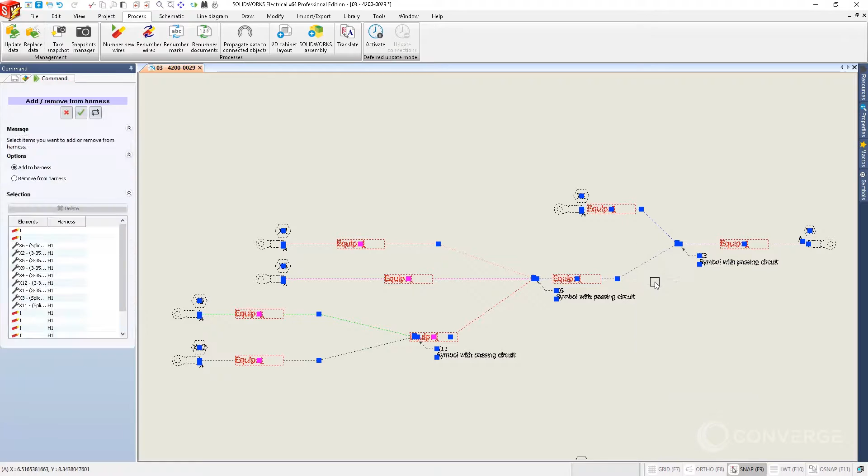You can now accurately represent real-world designs connecting multiple wire styles together. You can add all the wires and components to a single harness to prepare for 3D routing. When moving to 3D in SOLIDWORKS, this design is also supported. Simply add in a 3D part for the symbol and route as previously performed.

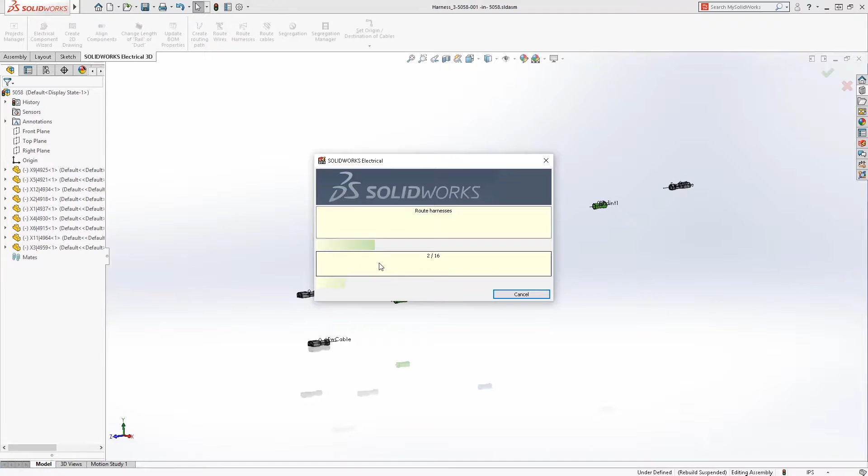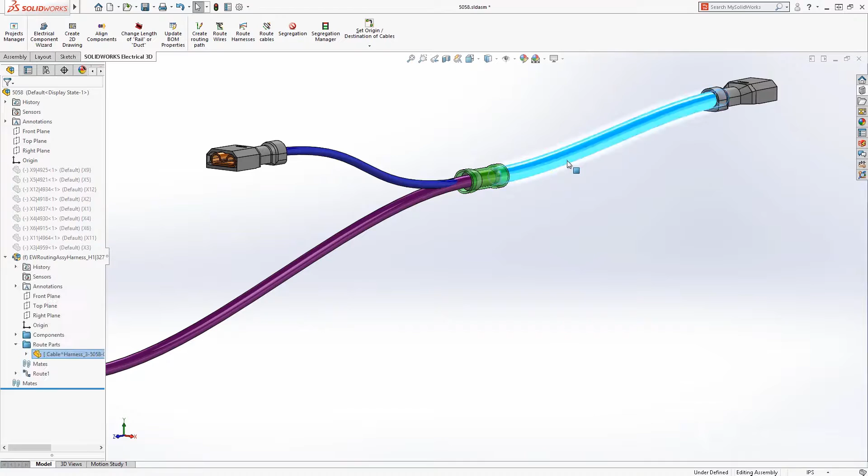Now in SOLIDWORKS 2019, you can create partial and fixed length coverings on your routes to easily represent tape, labels, and more. The new Partial Coverings Manager provides you with two options for defining your coverings. If you know the required length of the coverings, simply specify the value and define the offsets. If the length is unknown, you can specify offsets to achieve the required design. This is ideal for fixed length items such as labels or items that need to cover the majority of the route.

You are able to leverage your existing coverings library as well as create your own. You can even apply more than one covering per route. All of these new features will help you create realistic routes within SOLIDWORKS Electrical 3D.

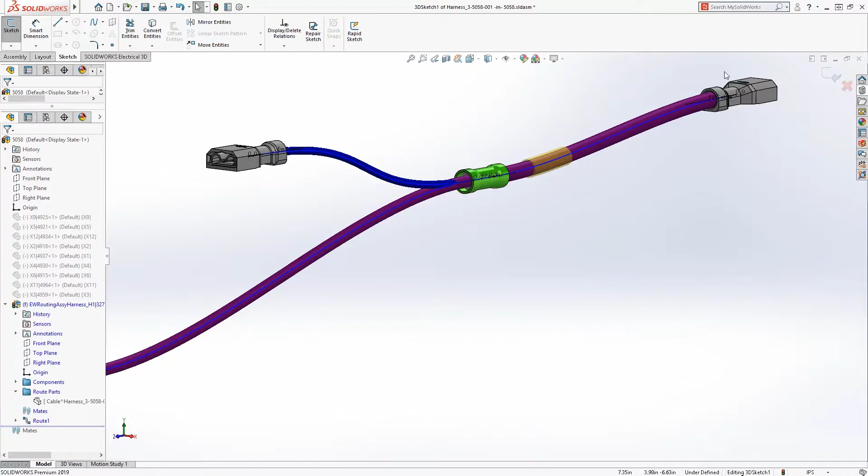SOLIDWORKS 2019 has a number of performance improvements as well. In the Routing Library Manager, the workflow in the Component Wizard has been revamped, reducing the number of steps and time required to run the wizard. The Select Components, Import Data, and Export Data functionality on the Piping and Tubing page has been streamlined as well, with improved performance and options to exclude folders within a scan. Reduce the time spent managing your library and get back to designing.

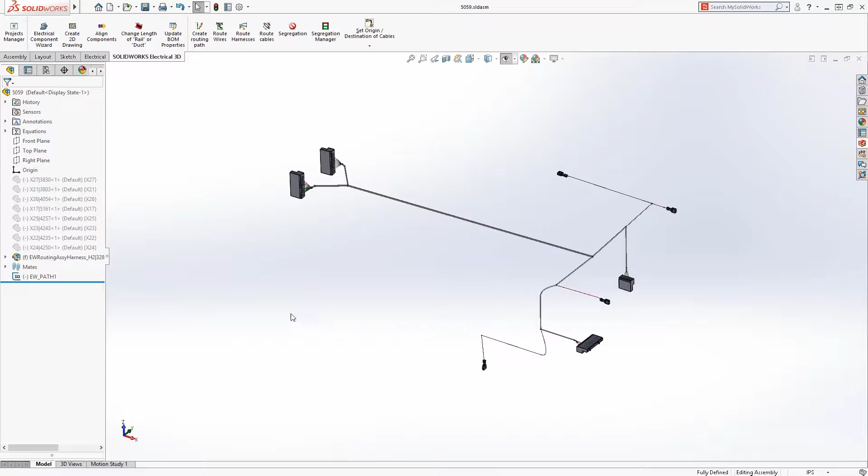SOLIDWORKS Electrical 2019 has improved the flattened drawing creation process with enhancements to save you both time and effort. Let's start with another harness in our project that is already complete. Improvements to the flattened drawing parameters make it easier than ever to create final drawings with SOLIDWORKS Electrical. New parameters and drawing options allow you to specify both the template and sheet formats. Create drawings in a format ready for inclusion in electrical file sets with the right size and templates to match the project.

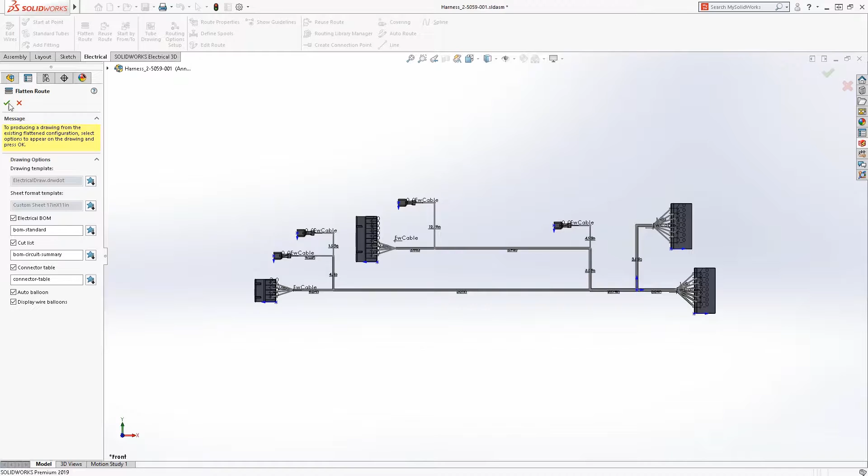Defining the options during flattening will reduce the need for editing after sending the flattened drawing back to electrical. Updates to the annotation flatten options make defining the start point and modifying the results a snap to ensure you get desired results. The flow of data between SOLIDWORKS Electrical and SOLIDWORKS Routing has been streamlined, resulting in accurate, clean tables on your flattened drawings. Components and wires are included in a single BOM with individual item numbers, making ballooning a snap.

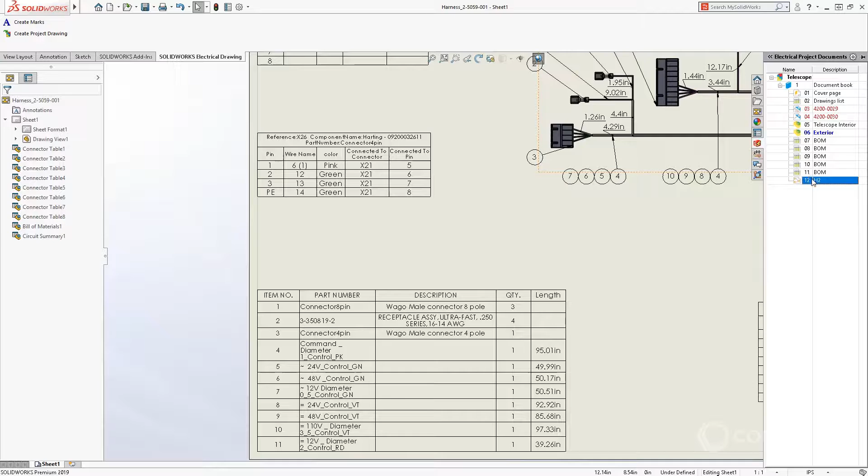As always, send the completed drawing back to the SOLIDWORKS Electrical project with both the blank sheet and template. Be sure it fits properly with our default electrical title block. Complete your flattened drawing layouts with easy, precise results in SOLIDWORKS 2019.

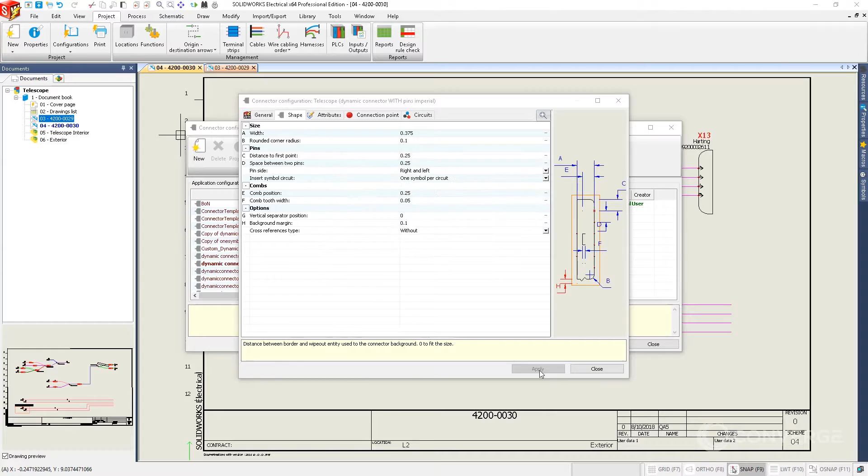In SOLIDWORKS Electrical 2019, the dynamic connector has new configuration and insertion options, creating even more flexibility when defining connectors on the fly. The connector configuration has expanded the parameters available to define the connector shape, with choices including corner radius value and pin side. It is easy to leverage the dynamic connector tool regardless of the symbol needed.

Let's add a new connector to this project to finish our harness design. New options in the insertion panel make it easy to turn on or off common variations to the same base symbol configurations. Wipeout frames, rounded corners, and continuation zigzag can all be individually controlled for simple modifications.

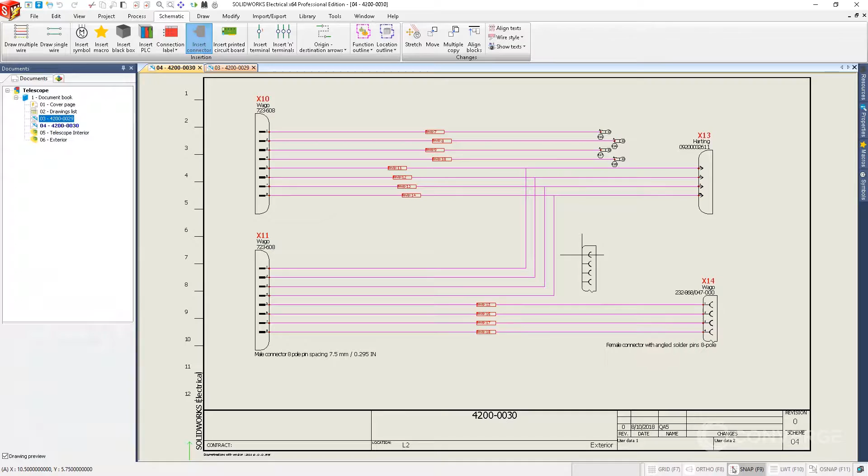Let's finish adding this connector on our other schematic. Note the zigzag indicates that this is just a part of the connector. These new options make it easier than ever to quickly define the exact connector symbol you need.

Creating and customizing reports is also now easier. The report editor has new modification options that enable you to control the results of your report generation. Isolate tables to a single page and add the table name to the schematic name. With more granularity, generated reports are more flexible, simplifying the design process.

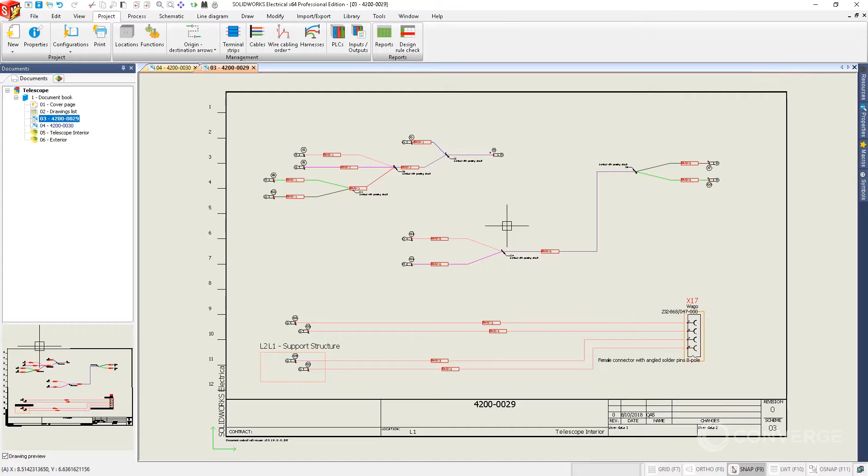Occasionally, creating just the right report requires the use of the expert mode to modify the SQL query. Enhancements to the SQL query editing tools make it easier than ever. The list of available variables on the right-hand side has been expanded to include application databases, keywords, and views. Simple and extended views are groups of commonly combined variables in one table.

Just insert the desired field to start building. A quick test confirms the addition was successful. All that is left is adding it to the column for the final report. Consolidated tables make report customization a breeze so you can focus on designing.

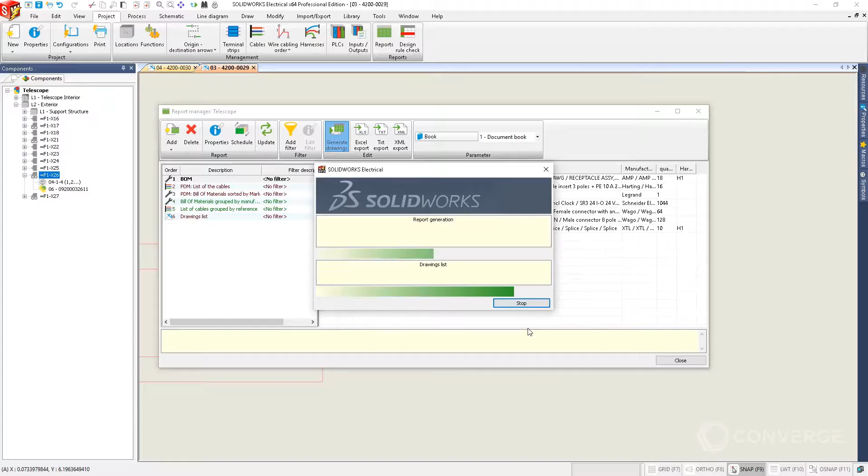Now, when working with the report in the manager, you may have noticed hyperlinks to review the part properties or to navigate to the schematic symbol. New in SOLIDWORKS 2019, generated reports contain hyperlinks to related component properties and symbols just like in the report manager. Let's generate this report and take a look.

Now with easier navigation and more ways to customize your reports, SOLIDWORKS Electrical 2019 makes it easier than ever to get your projects done faster with the right information.

SOLIDWORKS Electrical 2019 includes a number of user interface enhancements, increasing ease of operation and productivity. The first thing you will notice is that the icons have been updated to support 4K monitors. A number of windows have seen a facelift, including the Revision Manager and the Libraries Manager. The Go-To command has been integrated into the PLC Manager and in the Wire Cabling Order Manager, again reducing the time spent navigating the project.

Another great time saver is the new option to convert single line or schematics to mixed scheme drawings, if you need to expand to include both styles. Throughout the software, a number of new time-saving buttons are now available. Insert macros from a new button in the schematic ribbon bar. Within the Origin and Destination Arrow Manager, a new option allows you to delete multiple arrows in a single operation,

reducing the clicks required. Finally, the new Cable Core Swap button in the Terminal Strip Manager lets you quickly fix a common mistake right from the manager with no need to go back to the schematic. All of these UI improvements make it easier than ever to navigate the software and complete your designs.

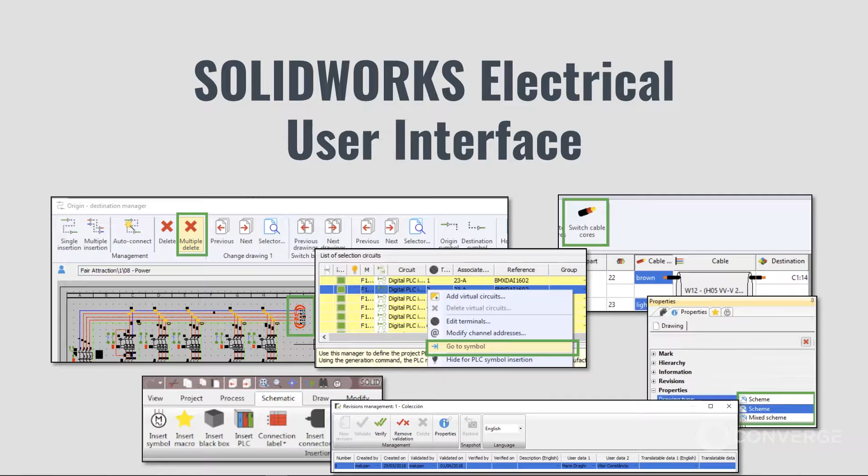As you work within SOLIDWORKS Electrical 2019, you will find a variety of delighters to improve your work processes. New in 2019, archive projects using the Archive Project Wizard to choose whether dependencies like 3D files, images, and shortcut data are included in the archive. Ensure the project archive includes exactly the data you need the first time.

A new report captures termination type information applied to manufacturer's parts and aggregates the data into one report, grouped by type. Easily reference all the termination types needed for a project in one place. Control the termination types available within the new Termination Type Manager.

In the Manufacturer's Parts Manager, you will see a new option to set the display units of each part's properties in the manager, as well as that superparts have been renamed to electrical assemblies, resulting in a cleaner, easier to use interface. Keep a lookout for new functions in the Project Configurations Manager, including black box connection point customization labels and renumbering component priority order. Black box connection point customizations in particular are an exciting option to ensure even on-the-fly components represent required information from the start.

SOLIDWORKS Electrical introduces the PDM connector tool as a new data management option with SOLIDWORKS PDM Professional. It is a powerful and unique integration in the electrical software sphere. Manage your electrical files with the familiar and powerful SOLIDWORKS PDM interface. The project folder structure in SOLIDWORKS Electrical is mirrored in the project structure within the vault.

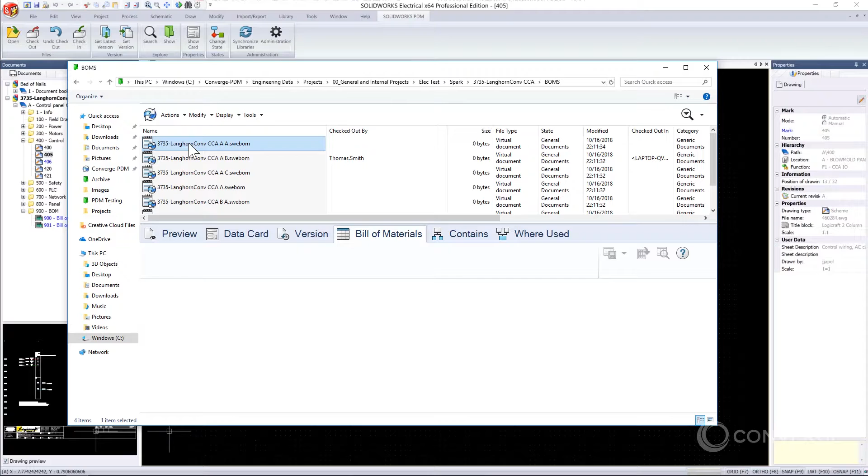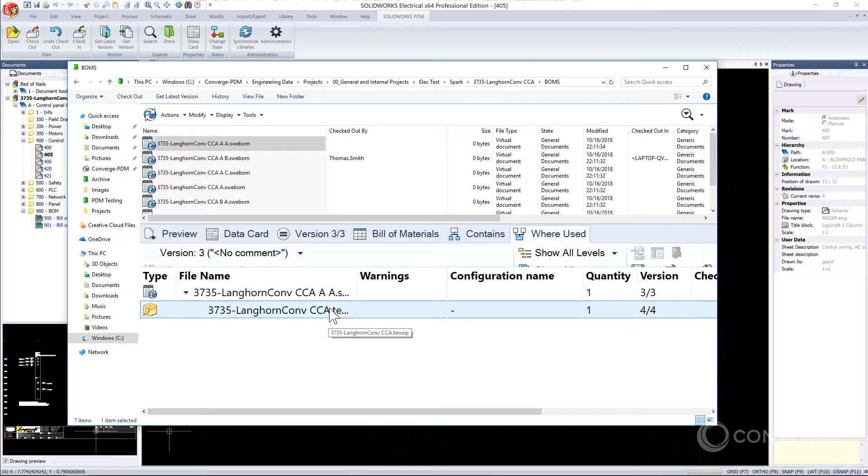Accurate bills of materials are automatically placed in a separate folder, and they are easily accessible by anyone across the organization, not just the electrical designers. Information for these parts is synchronized between the SOLIDWORKS Electrical Library and the SOLIDWORKS PDM Vault. Use SOLIDWORKS PDM as your true source for all product design data, not just mechanical. Design teams will always have access to up-to-date information, keeping your project accurate and on time.

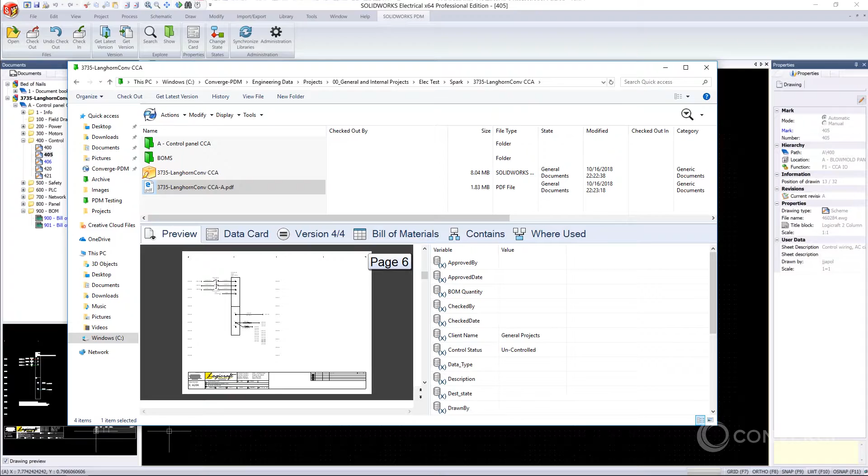The brand new SOLIDWORKS PDM connector tool for SOLIDWORKS Electrical gives you greater control while enabling better collaboration between mechanical and electrical design teams. SOLIDWORKS Electrical continues to advance and innovate, reducing project timescales and increasing product quality.

For SOLIDWORKS 2019, they have added new capabilities to PCB collaboration to be able to import copper as well as decals into SOLIDWORKS. This control can be found inside of settings for the collaboration. The first thing we are going to do is turn the copper option off. I have pushed this design from SOLIDWORKS PCB with the copper option off and opened it inside of SOLIDWORKS Mechanical.

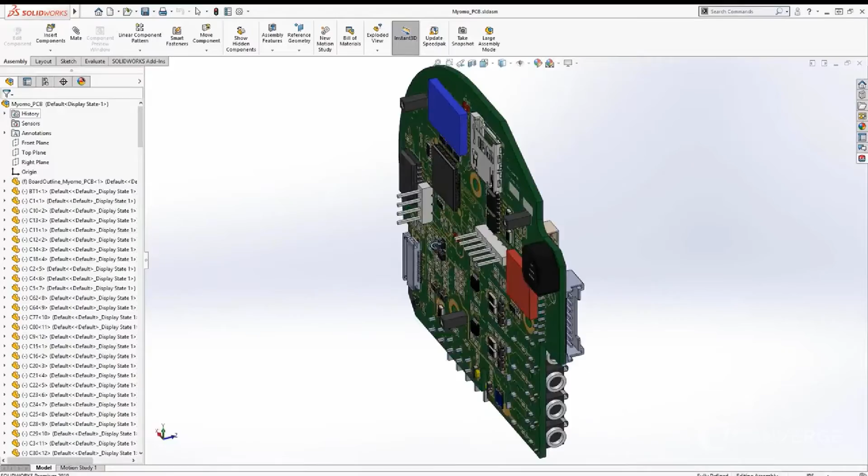I've brought in the design, and you can see the decals and graphical representation of the top and bottom layers. There are no inner layers for copper inside of this design. By turning the copper representation on, we are going to re-import this design from SOLIDWORKS PCB. This new design will bring in additional information for decals and copper representation on all layers.

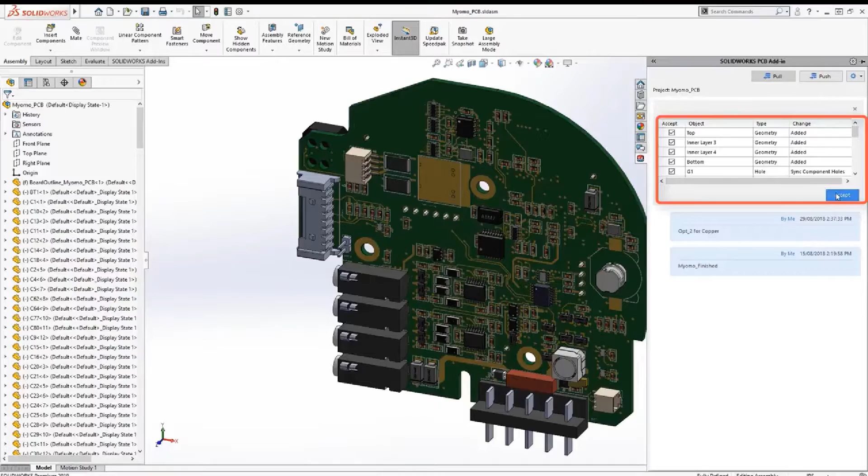SOLIDWORKS Mechanical automatically notifies us of this new version from PCB. Noting we have additional copper layer information, we are going to accept these and open inside of SOLIDWORKS. My feature manager will now have additional layer information for the copper layer as well as decals from PCB. Back in SOLIDWORKS, we are going to change the transparency of the board so we can see inside the inner layers, and all the copper layers are now visible inside of MCAD.

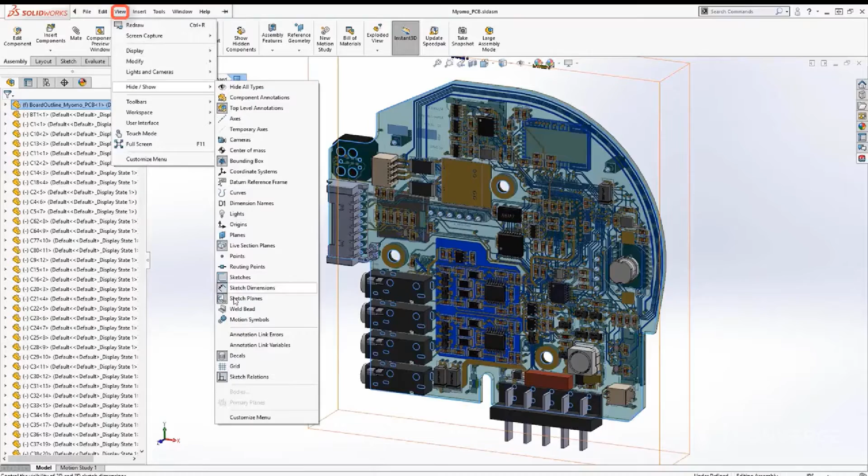We are going to hide all decals so it's easier to identify the inner layers. We are also going to assign different colors to our copper layers. We can now see that every trace and every via can be viewed inside of SOLIDWORKS Mechanical just as it is inside of PCB. This allows the mechanical engineer to see how much copper is on each layer, also allowing him later on to transfer this copper information into flow simulation for thermal analysis, allowing PCB to collaborate with MCAD for in-depth studies.

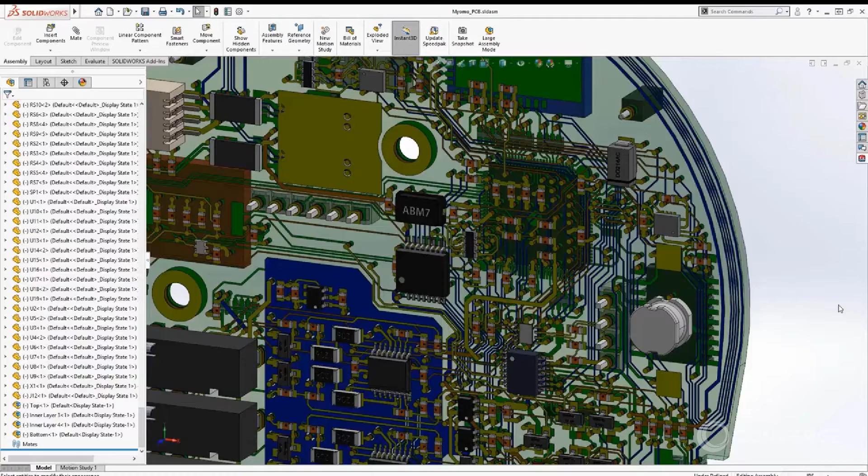When designing a PCB board, you might not always know the location of mounting holes for other mechanical features. Using SOLIDWORKS PCB, we're going to send this blank board to our mechanical engineer and have him add mounting holes inside of SOLIDWORKS. Using the same SOLIDWORKS PCB collaboration, we are going to look for a blank board that we have sent by searching in projects and opening inside of SOLIDWORKS.

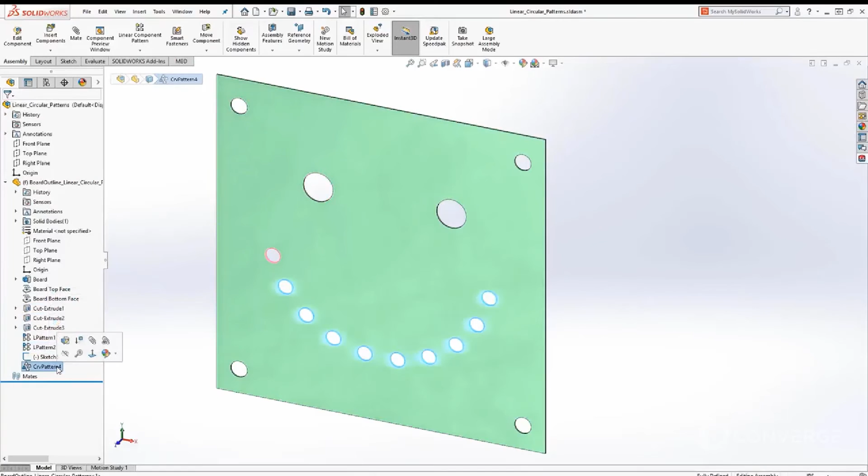The mechanical engineer has added different size holes on this board, utilizing many of the SOLIDWORKS patterning features to create them. Once he has completed his design, he will push it back to SOLIDWORKS PCB. SOLIDWORKS PCB automatically notifies you when a mechanical engineer has made changes. We will accept all the mounting holes and other holes which will automatically show up in PCB.

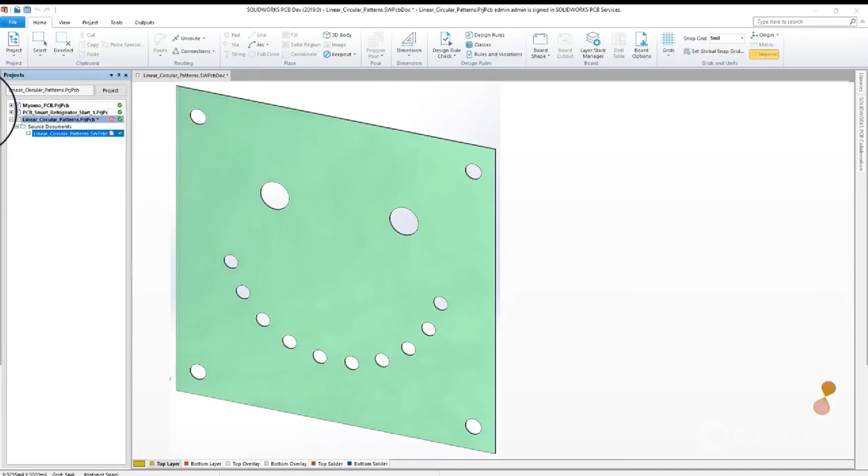This is a tremendous time saver to leverage SOLIDWORKS mechanical capabilities by adding holes of different style patterns, effortlessly incorporating them into SOLIDWORKS PCB, eliminating any possible misalignment between MCAD and ECAD. That concludes the SOLIDWORKS Electrical and PCB 2019 What's New presentation.